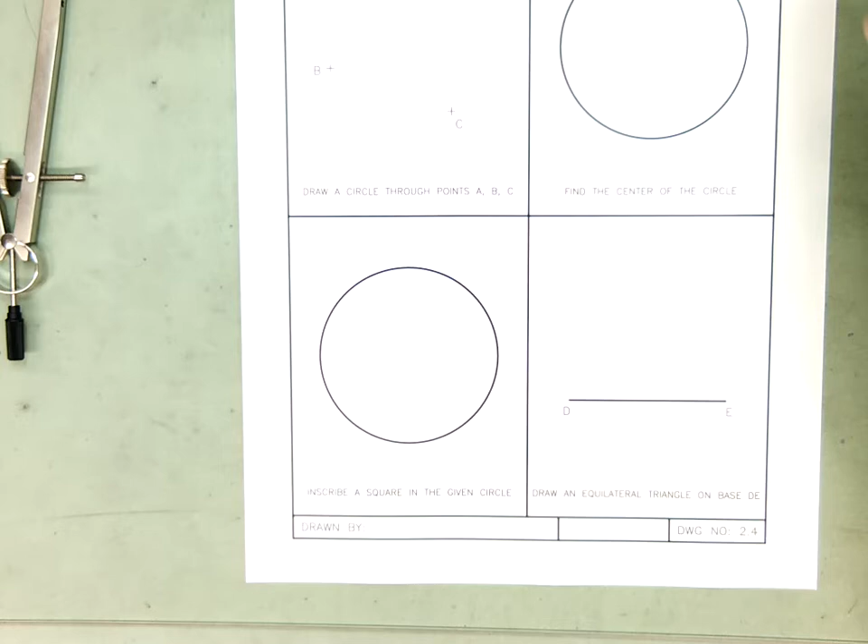For drawing 2.4, we're going to be working with some circles, and in order to pull this off successfully, we're going to have to tape our paper down.

So as usual, when we're working with tools, we want to be taped down. We'll pick a piece of tape about 5 inches long, you'll have 4 strips, and then use the horizontal edge printed on the page to line that up with the edge of your T-square or parallel bar.

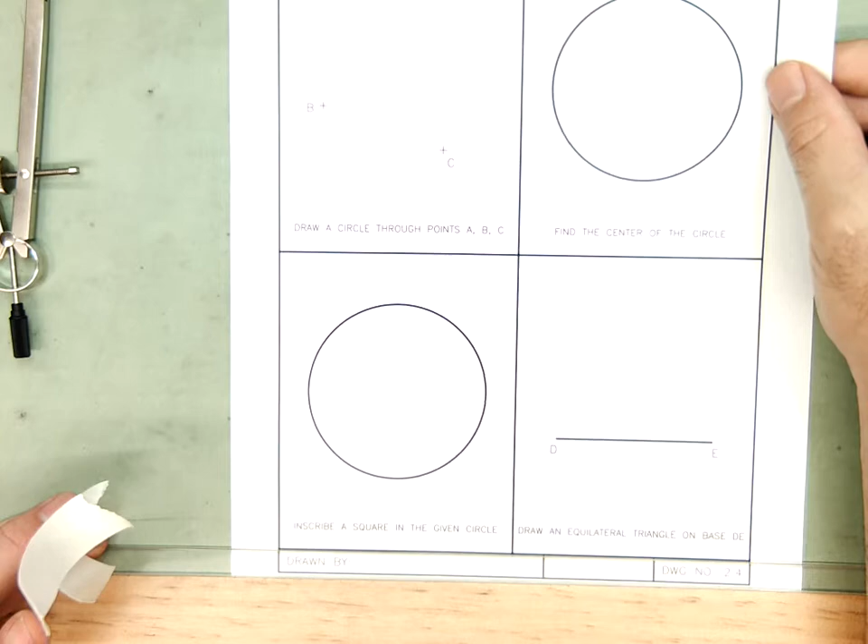And of course your T-square or parallel bar, the head of it on the left-hand side is against the table. I've got my tape on the top, and I've got my tape on the bottom. Now the page won't move around while I'm trying to draw it with the tools.

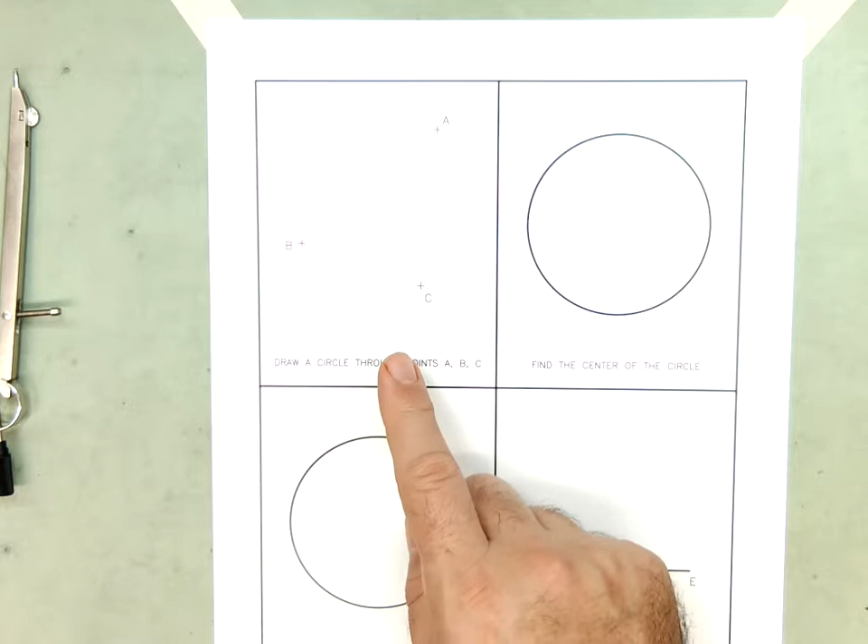So we have a number of different things that we're going to take care of on this one. The first one is to draw a circle through 3 points, point A, point B, and point C. Let's zoom in a little bit.

To do this, we're going to have to lay out some construction lines. First thing we're going to do is connect point A to point B. And you want to be very precise when you do this.

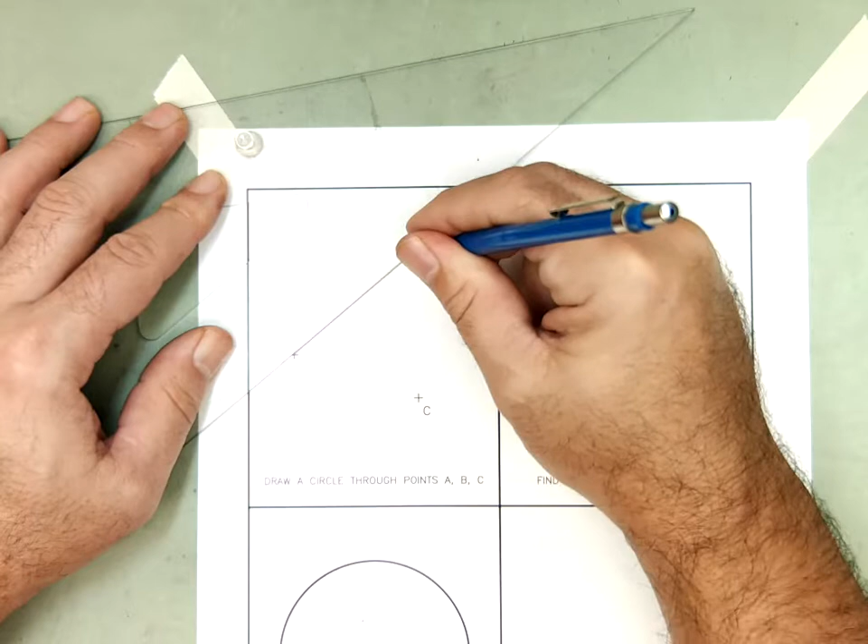Make sure the tip of your pencil is exactly at the intersection of point A, and it's going to land exactly at point B. Because if we're off a little tiny bit, that's going to show up later on. Alright, so that's my line AB.

What I'm going to do now is set up my compass and bisect this line. Now, this is something we've done before, bisect. So we know that we need to set up the compass on the point. The lead needs to go somewhere past the halfway point where we're estimating halfway is supposed to be. And then we're going to swing an arc.

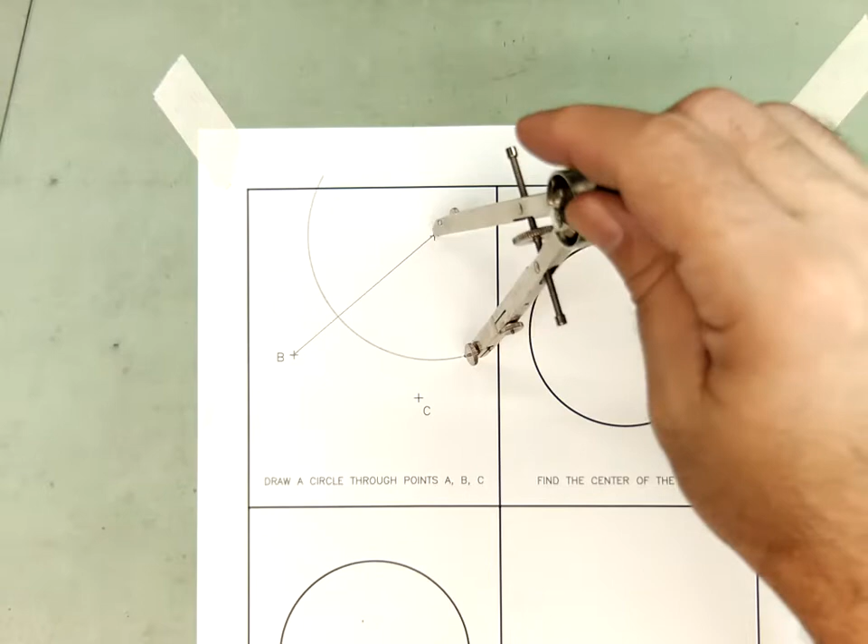And I'll do the same thing from the other point, point B, at the other end of the line. Again, very precise on your needle. And we'll swing an arc. I'm being very careful not to change the radius or move the wheel while I'm doing this.

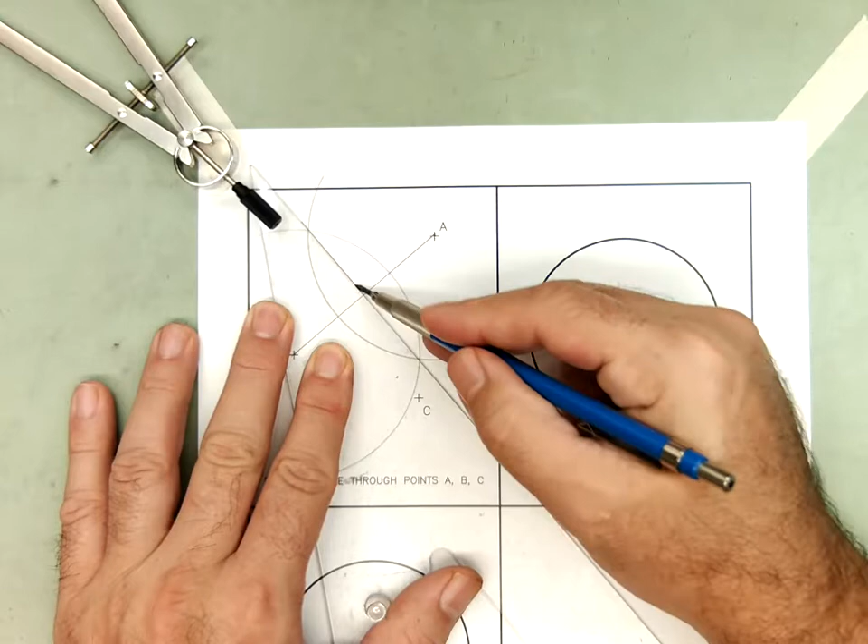Alright, and there's the football shape. And we know that what we do is we line up the 2 points on the football, and carefully draw a line through them. And that line there is the bisector.

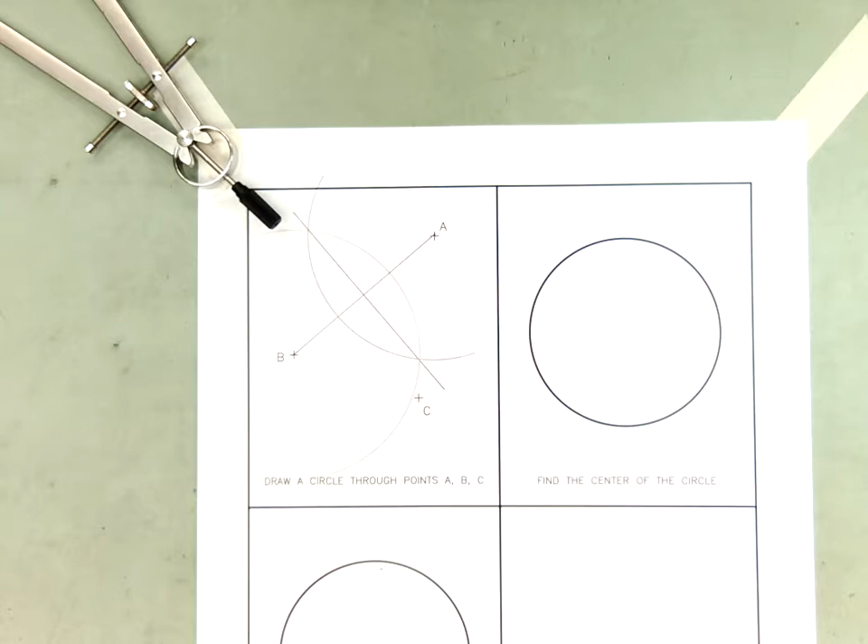Okay, so what I really wanted was the bisector. Now if it makes it easier for you to keep track of what you're doing, you can go in and do a little bit of erasing. You could erase the arcs, because we don't need them anymore.

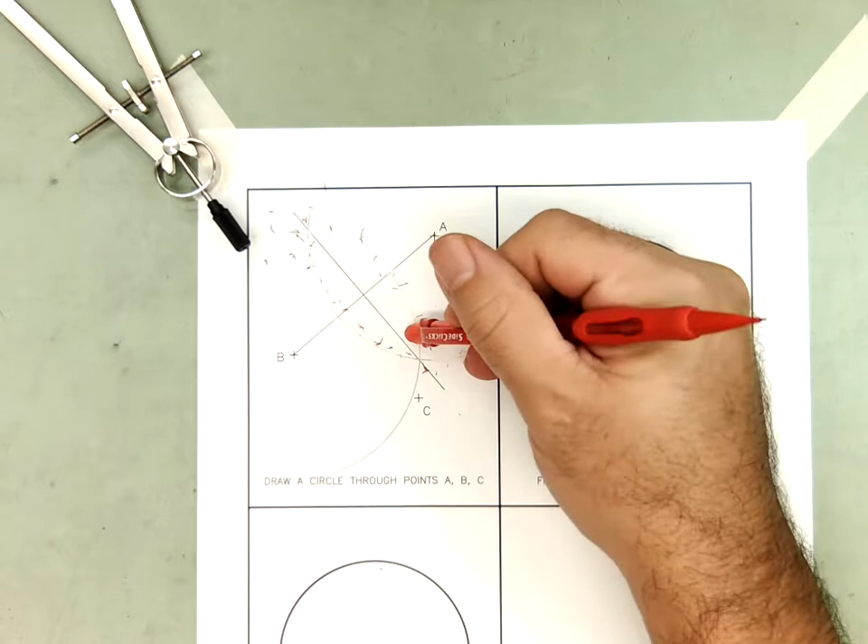And you don't have to be too crazy about erasing them. If they're lightly left on the page, that's fine. So mostly what I cared about was the bisecting line. And we can even get rid of line AB, or at least most of it. Okay, so this is the bisector of line AB.

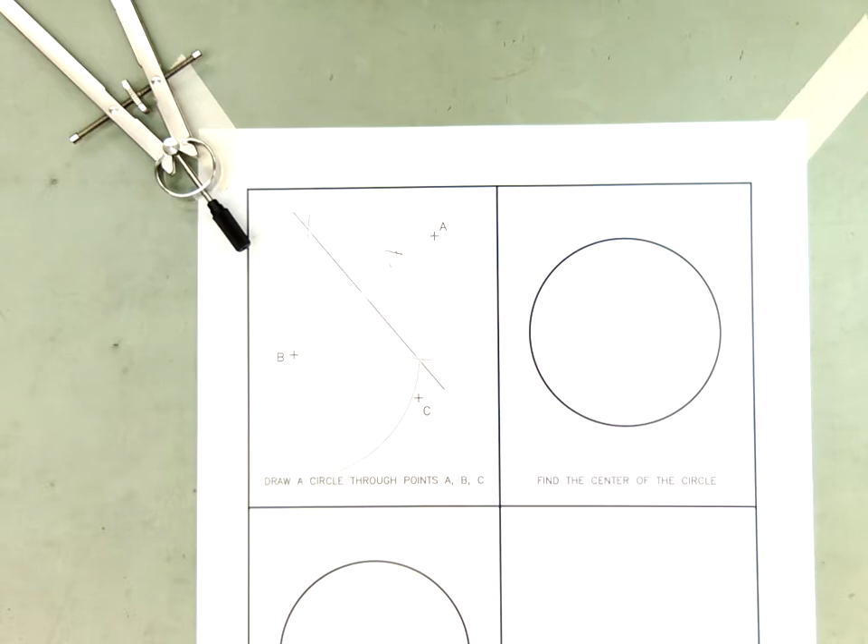I'm going to make another line now, line BC. You could do AC if you want, you could do BC if you want. The point is we're going to connect 2 of the other points.

So again, very precise on my start point. Make sure that when you finish, very precise on your end point. That is line BC.

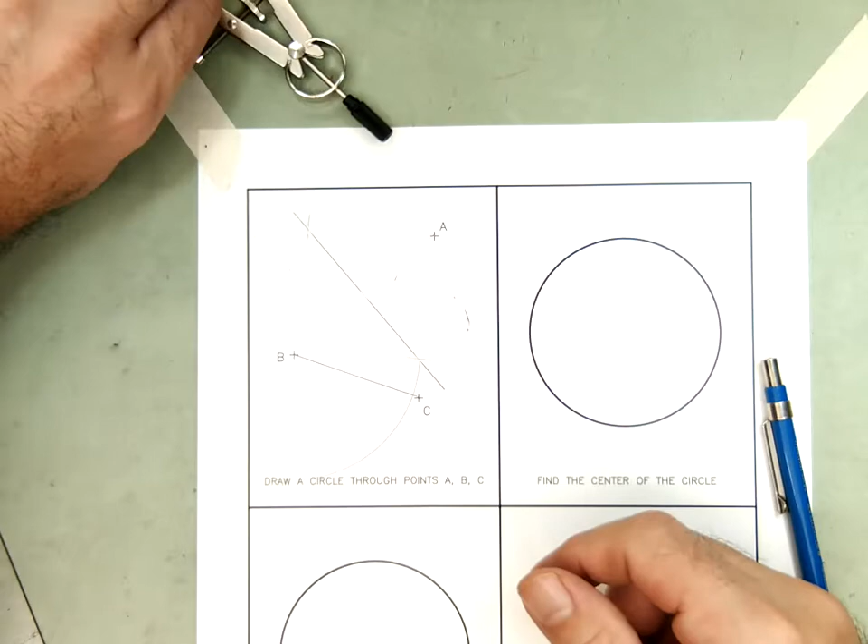Okay. I haven't moved my distance here, I haven't spun the wheel any, so I'm going to just recycle the setting that it's on. Right, here is my arc for circle at point B. I'm going to do the same radius circle at point C.

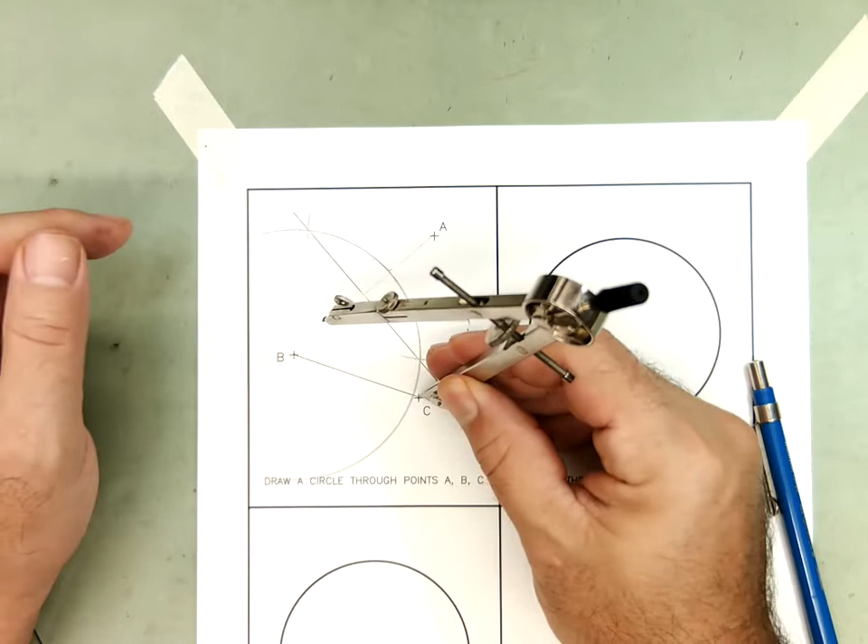And what we'll see is, there it is, right? Another football. And if I want to bisect, I'm going to draw a line from one end of the football through the other end.

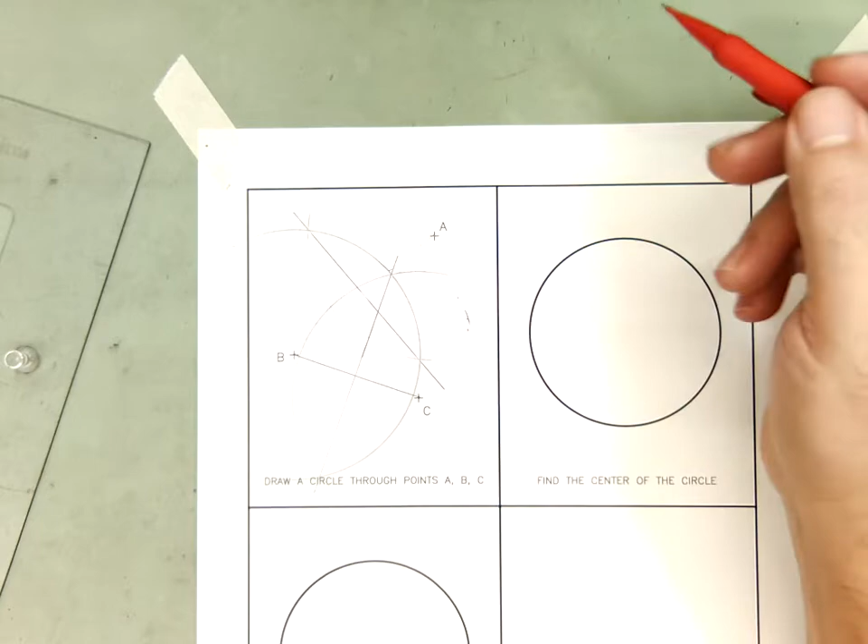Again, what do I care about? I care about the bisector of AB. I care about the bisector of BC. I really don't care about anything else on here. So what I'm going to do is just clear things up a little bit, erase some of that line work I don't need anymore.

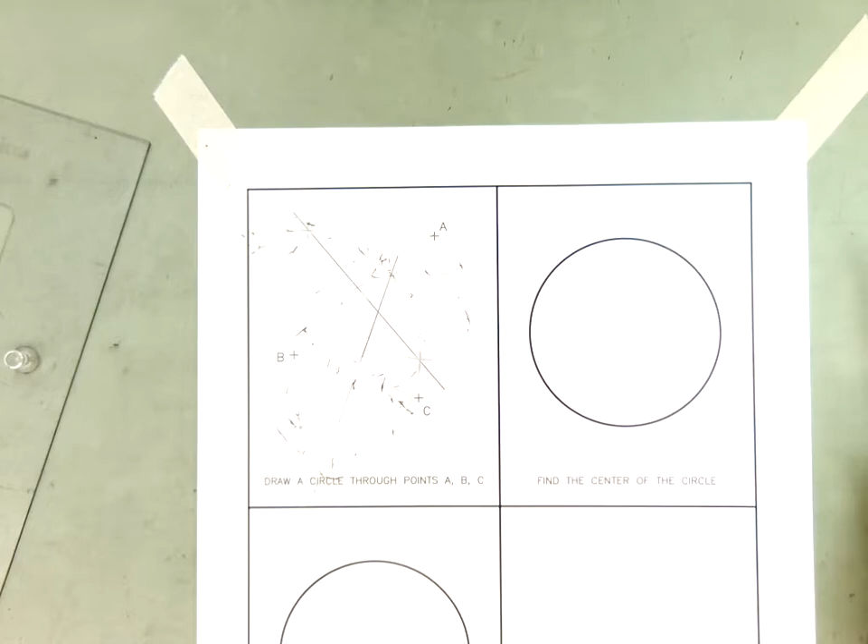I can get rid of the two arcs I just drew, and the line from B to C. What I'm really looking for is that spot right there. X marks the spot. All we need is that small x, because that tells me where I need to start my circle.

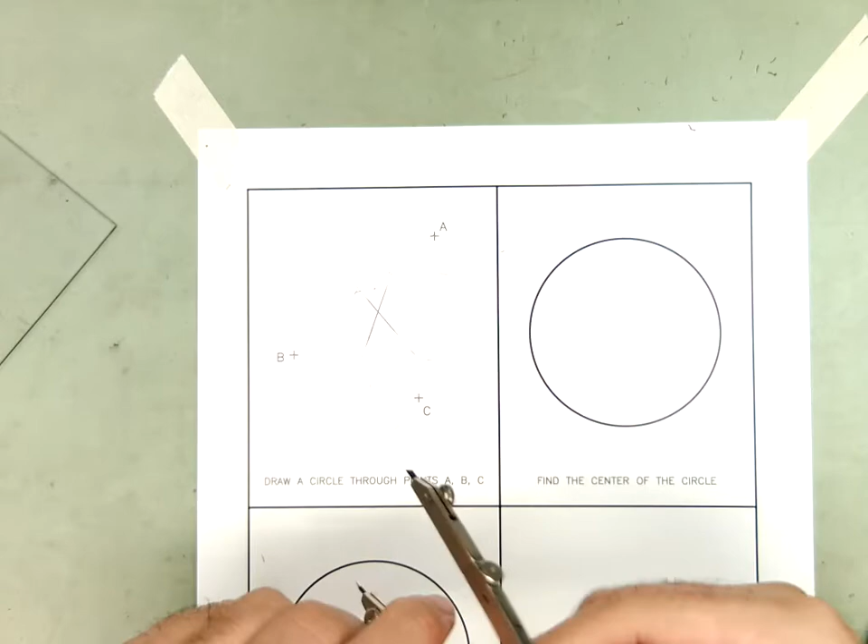So what am I going to do? We're going to take our compass and adjust it. We're going to put the point at the X. X marks the spot. We're going to adjust the wheel and move the lead until it's touching one of those points. I'm going to set my lead to touch point B.

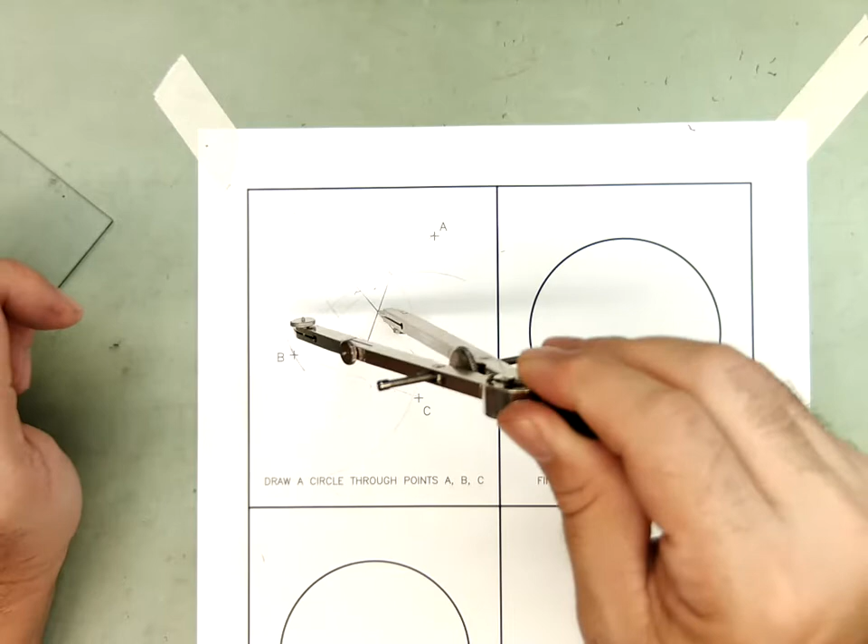But before I draw a circle, I want to verify. Does it also touch point A? It does. Does it also touch point C? It does. So now when I make my circle, I'm going to have a circle that passes through all 3 points.

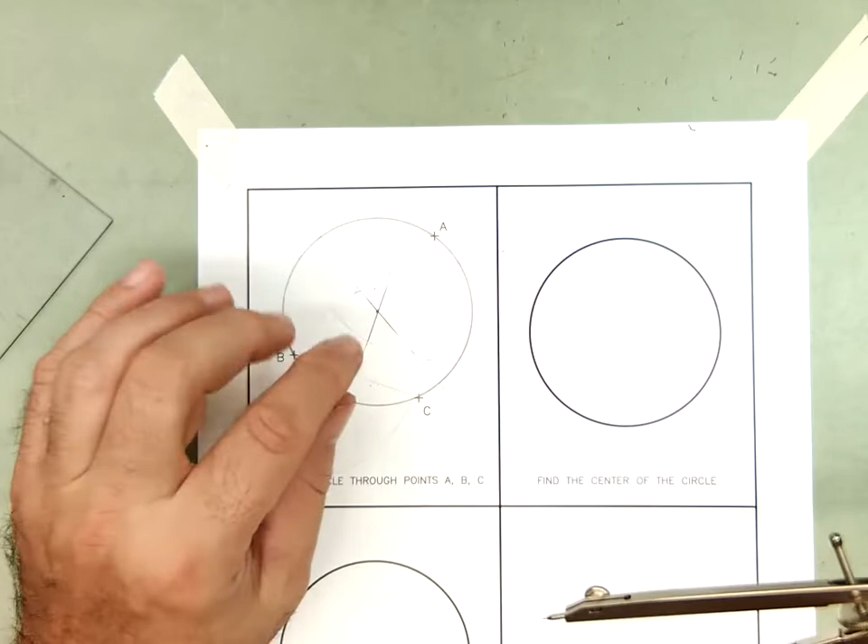Now, if you're off a little bit, you might want to examine: did I really put the needle in the exact center, or is it off a little? And when I bisected my lines, did I really take my time and make it careful? Because if you're off just a tiny bit on each of those things, at the end we're going to have a big gap at least at one of these points. So this is how we draw a circle through 3 points, A, B, and C.

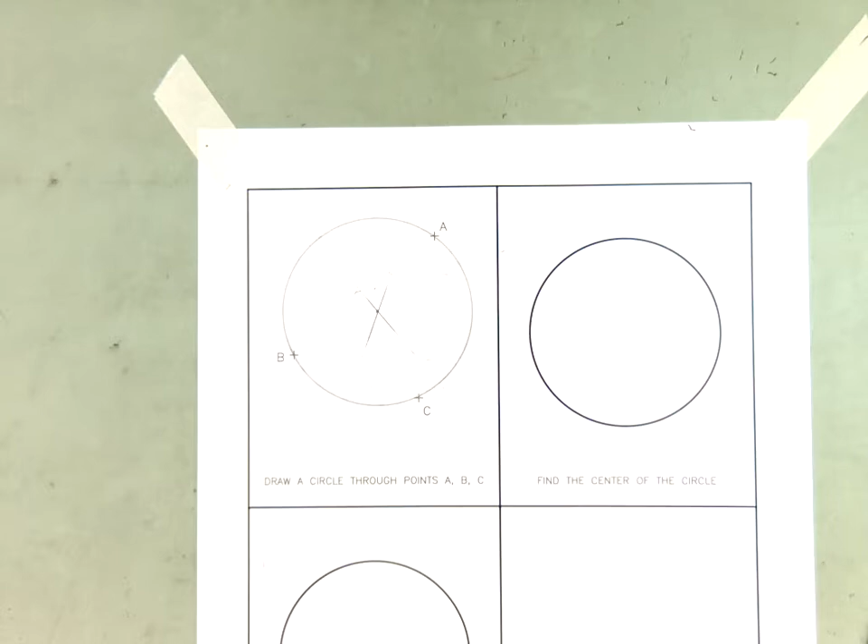Our next task is to find the center of the circle. So I have the circle here, but I don't know where the center point is. I didn't make it with a compass, so there's no hole in the paper to tell me where the center is. So this is really simple.

If you are taped down, and if your parallel bar has been set up, or your T-square, and you're able to draw some parallel lines, some straight horizontal lines, what you want to do is draw a line at the very top of that circle. You want to draw a line tangent to the top of that circle.

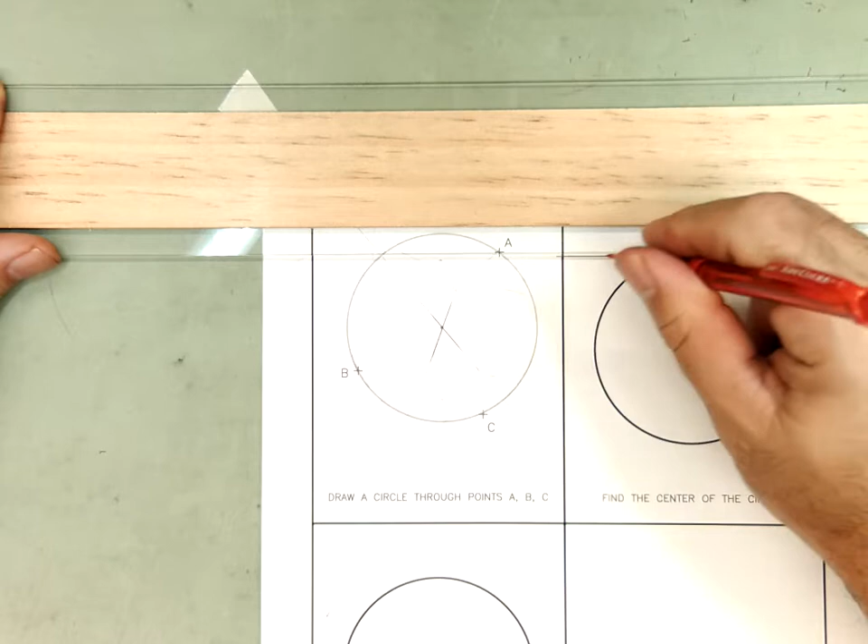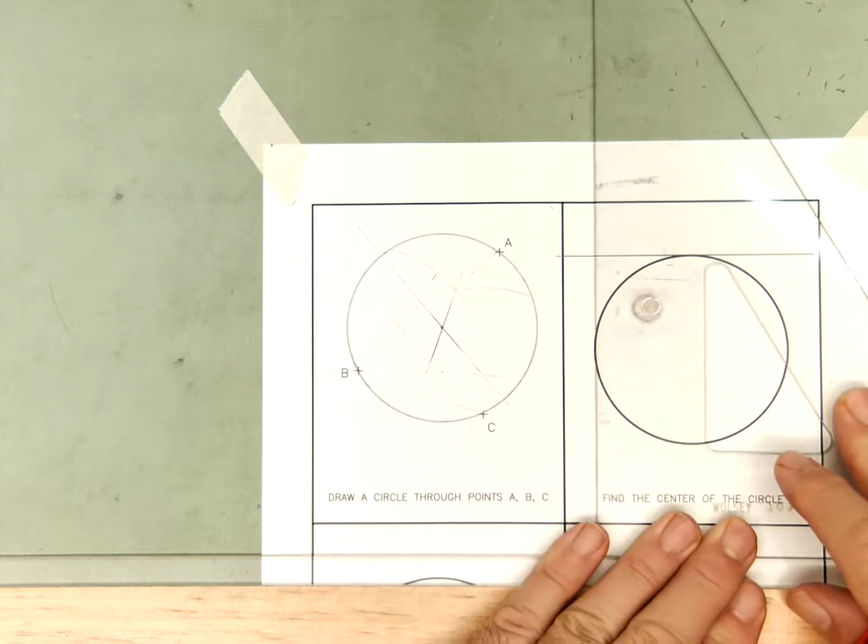Now again, make sure you're being very precise, because being off a little bit is not going to give us the results that we want.

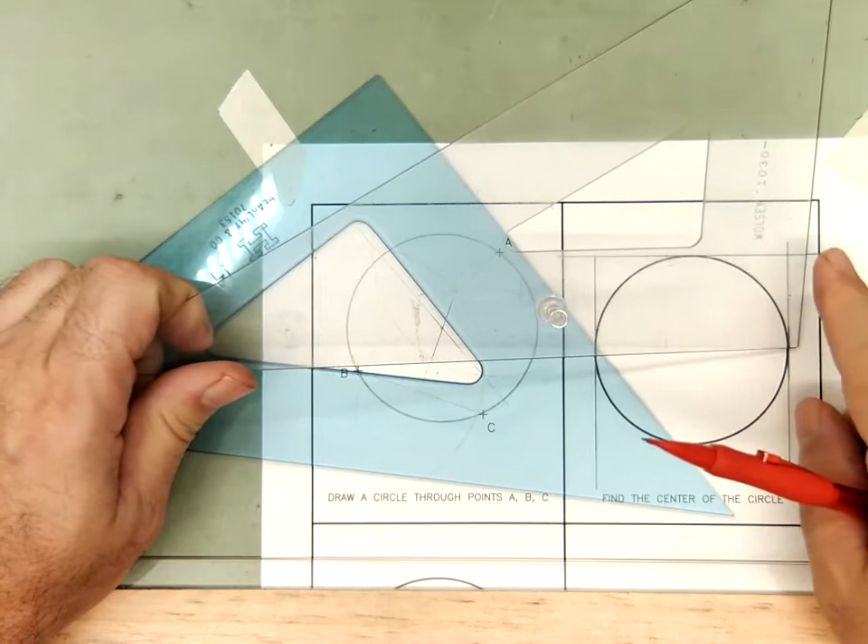And now for our next trick, what we want is our 45-degree triangle. Now we don't want the long, skinny one. That's 30, 60, 90. We want the one that's got 2 equal angles, 45, 45, 90.

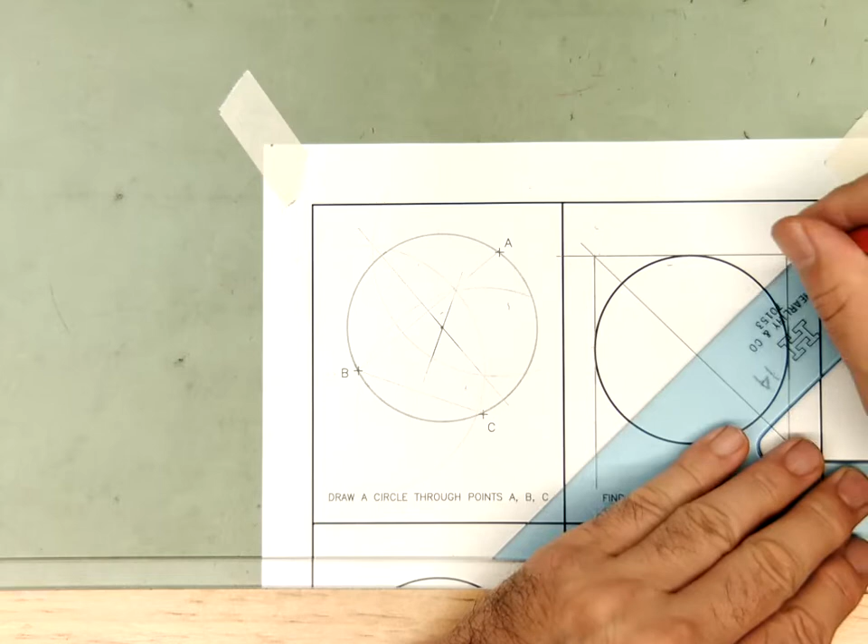What you can do is put your 45-degree triangle up at this corner and go down. And you can put your 45-degree triangle up at this corner and go down. And in doing so, we just found the center of our circle.

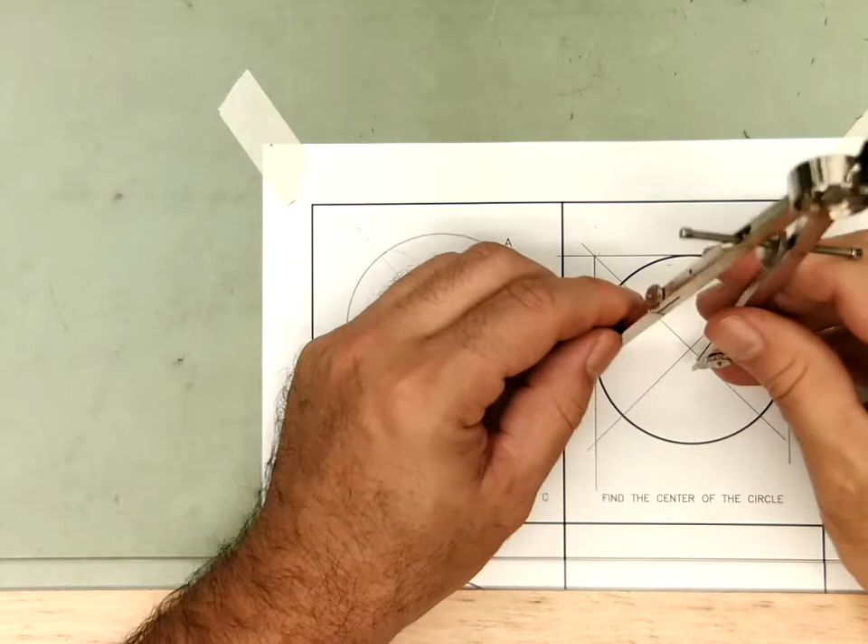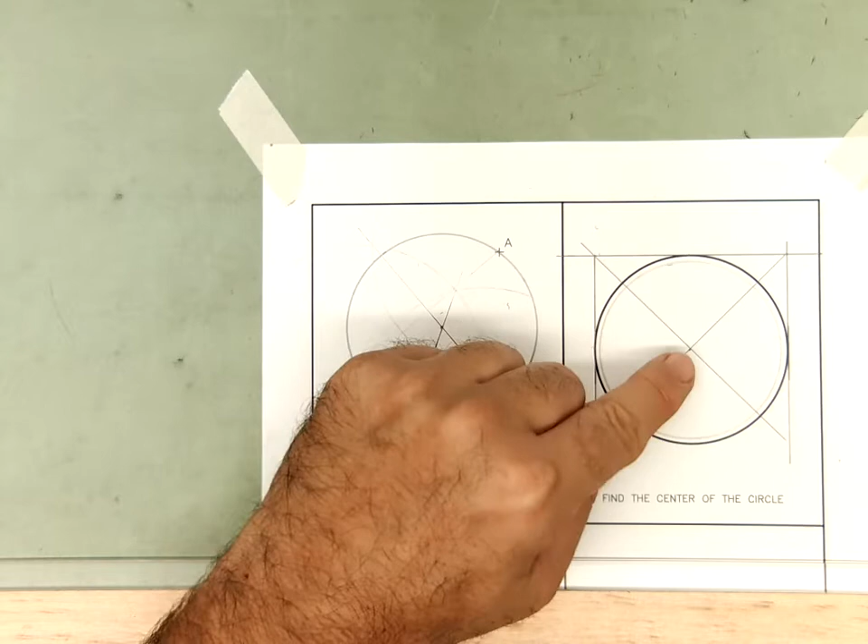If you're not sure, if you wanted to double check it to make sure you got it right, put the compass point in the very center of the circle. Make a little circle just a little bit smaller than the circle that's there. And what we should see is an even gap all the way around. That shows us we did find the exact center of that circle.

So, we didn't know where the center was, now we do. Here, we didn't know where to put the center point to make the circle. It took a lot more work.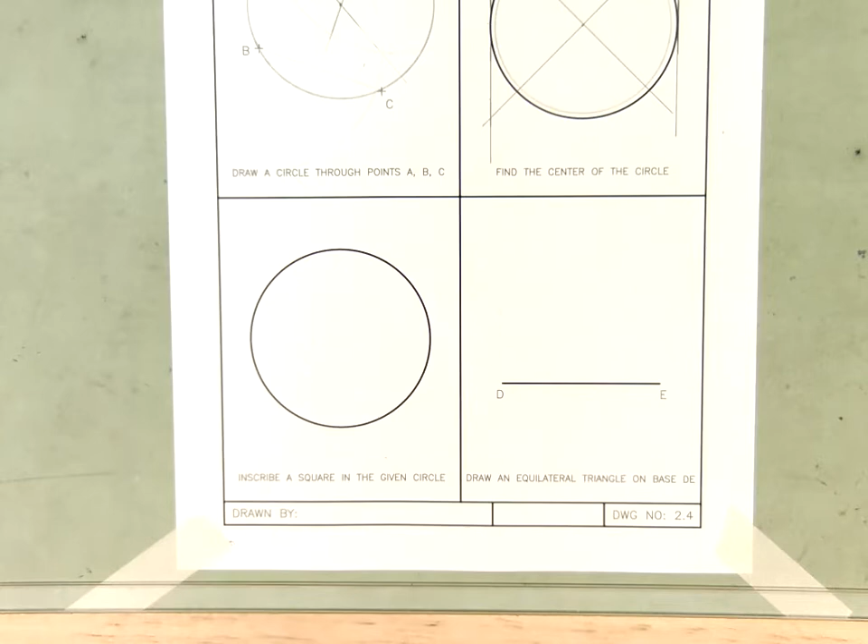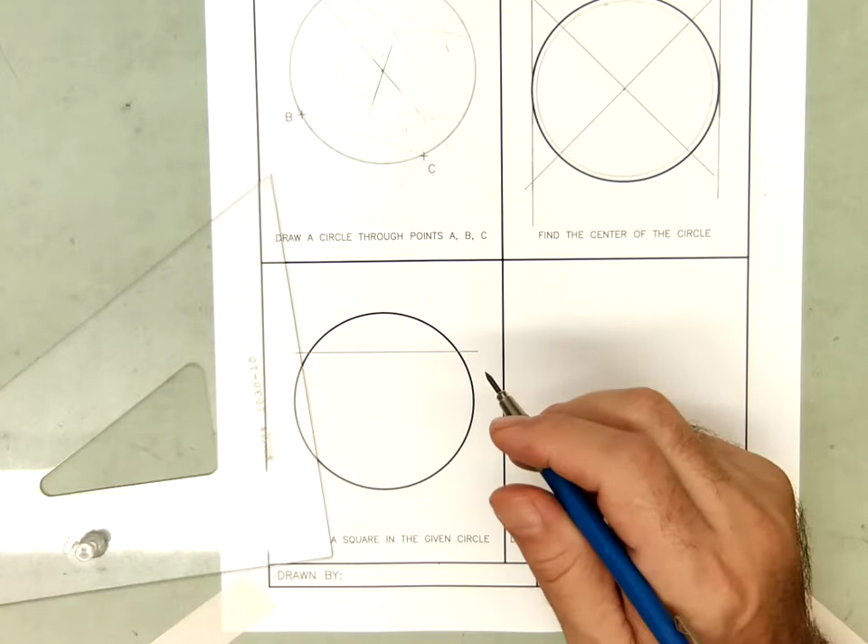Fact is, you could draw a line anywhere through the top part of that circle to find its center. I'm going to draw a horizontal line going exactly through. Then if you bring down the point where the circle intersects that horizontal line, remember I'm using my parallel bar and my triangle, one on top of the other. I'm going to come straight down, and I'll do the same thing over here, coming straight down.

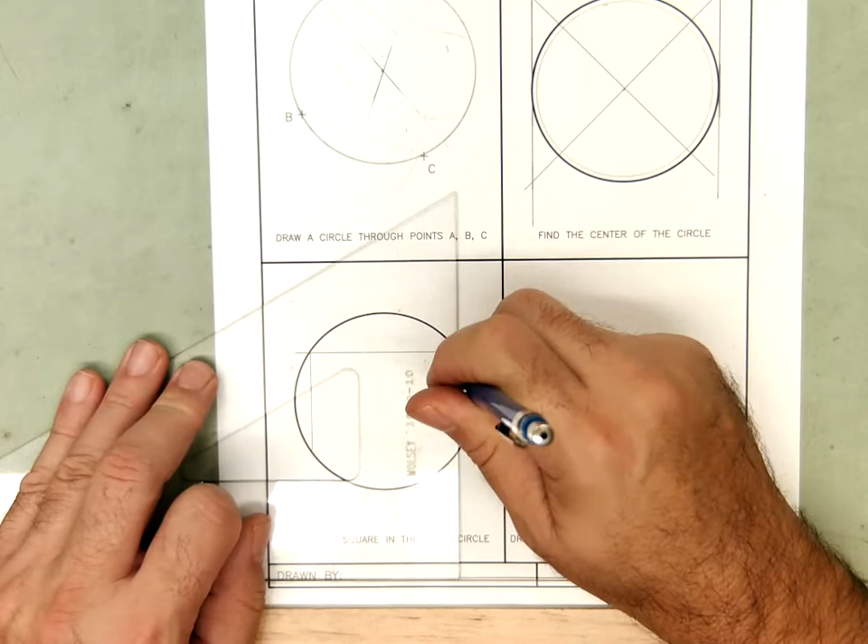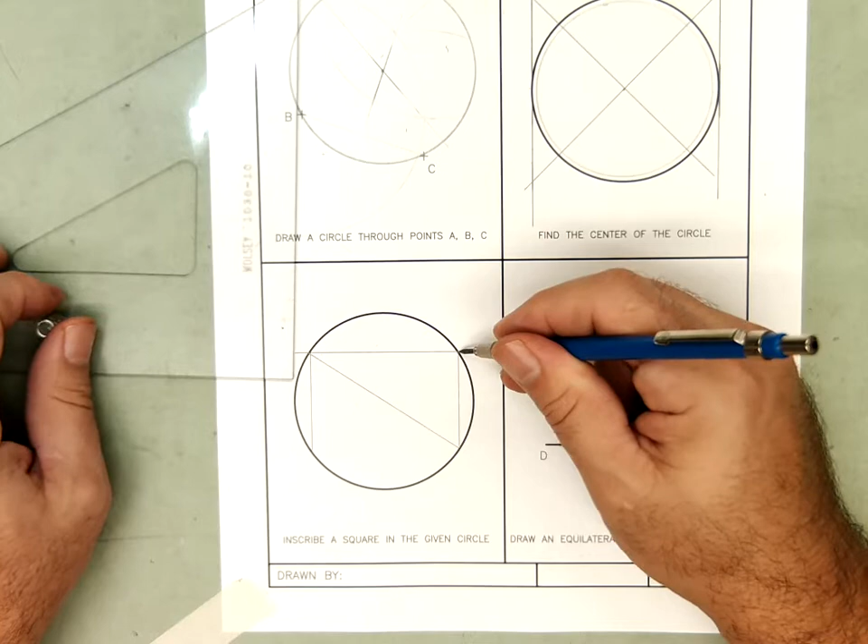Now I can just pick up my triangle and freewheel it from here to here, where the line ends against the circle, to where the line ends against the circle. I'll do the same thing here, from where the line ends against the circle to the opposite corner, where that line stops at the circle. Okay, and we just found the center point. So this is another way to find the center point of a circle. We did one way up here, and we're doing a second way here.

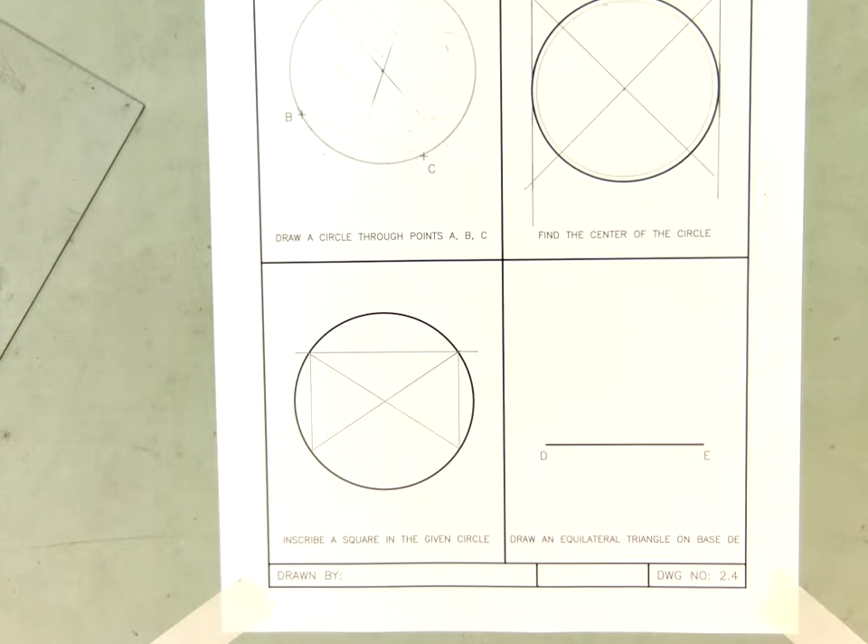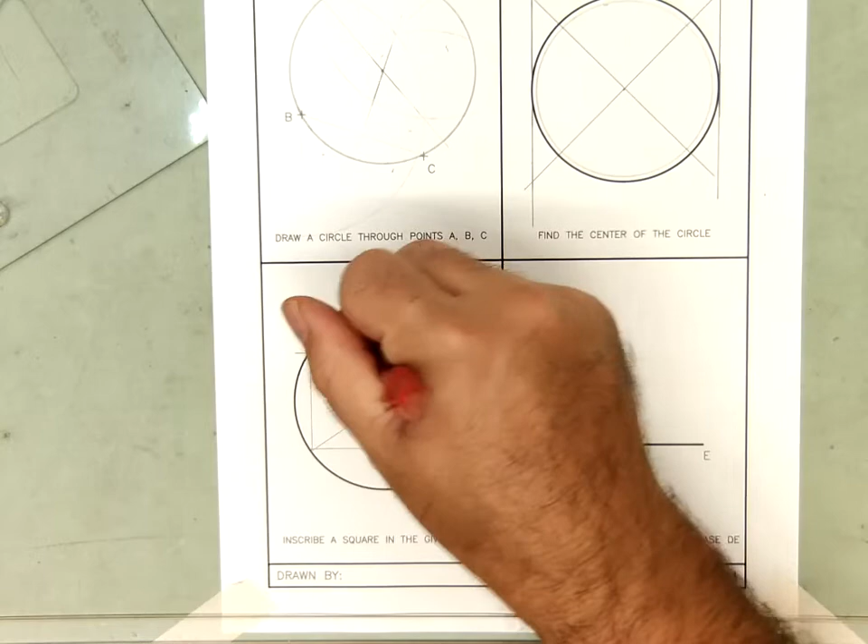Now, the task wasn't to find the center. The task was to draw a square inside that circle. And this is not a square. I don't know if you can see this, but if you were to do this, that's a rectangle, not a square. The reason we set up the three lines and the X was to find the center point, because that's essential to what we're about to do. I'm going to get rid of everything else I drew, and I'm hoping you drew yours lightly, so when it's time to erase, there's no problem.

Okay, what I really want is X. X marks the spot. So now that I know where the center of the circle is, I'm going to take my 45-degree triangle, start at the center point, and go up to the edge of the circle, the perimeter of the circle, at 45 degrees.

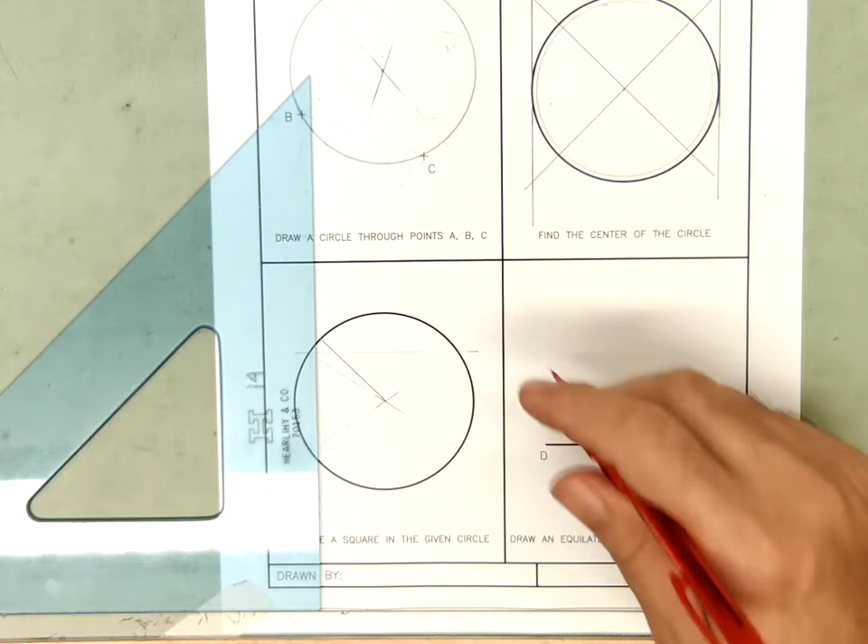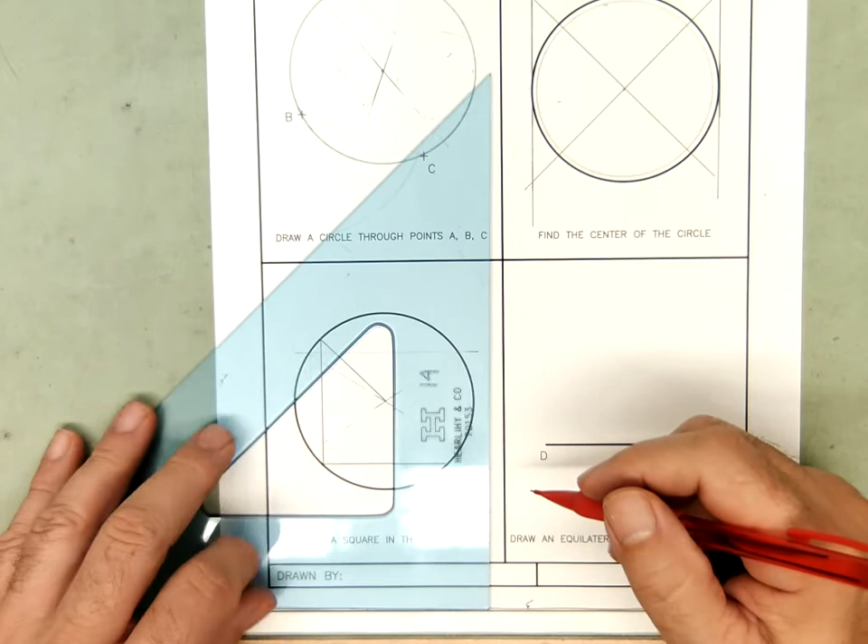Okay, here we are. So now I'm going to go down vertical, which means parallel bar, T-square is set up, triangles on top of it. Then make a new line. And then from that point I go horizontal to here. And from that point I go vertical. 1, 2, 3 sides, and then here's our final side.

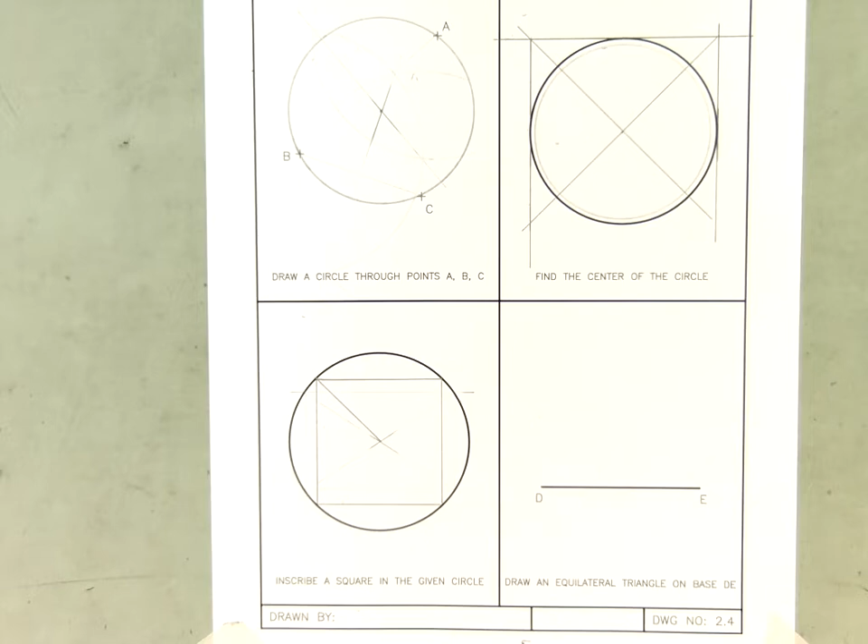And these two points should line up nicely. Okay, and that is our square drawn through, inscribed from the center point of the circle. Now, it looks to me like on the screen it looks more like a rectangle. In fact, there's some distortion going on, it looks like. This doesn't look like a circle, it looks like an ellipse. So I don't know what to tell you. We're having technical difficulties on the camera, and we're getting some distortion. But trust me, that's a circle, and that's a square. Just like that's a circle, and that's a circle.

All right, last but not least, draw an equilateral triangle on what base? DE. So we're going to draw a triangle with 3 sides, each side equal length. We're going to use DE as the base.

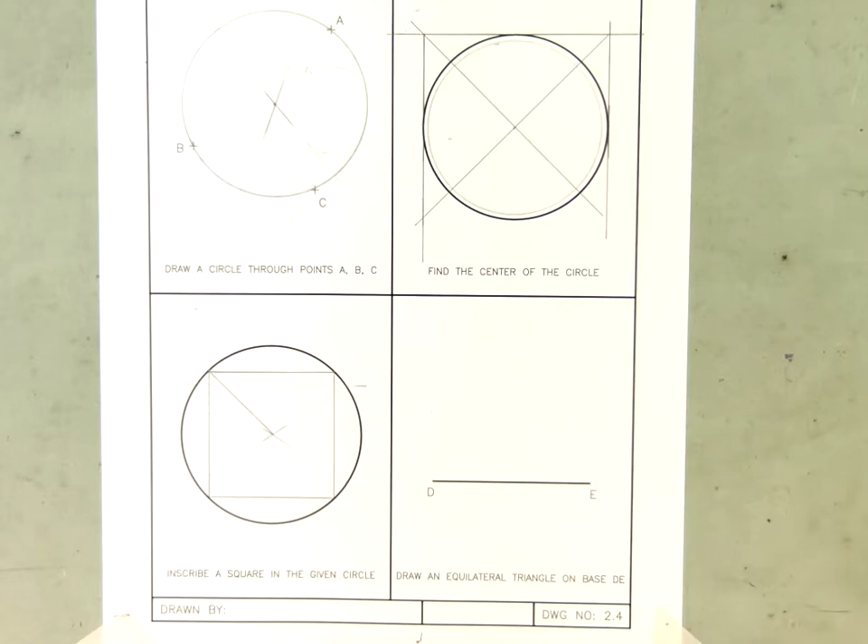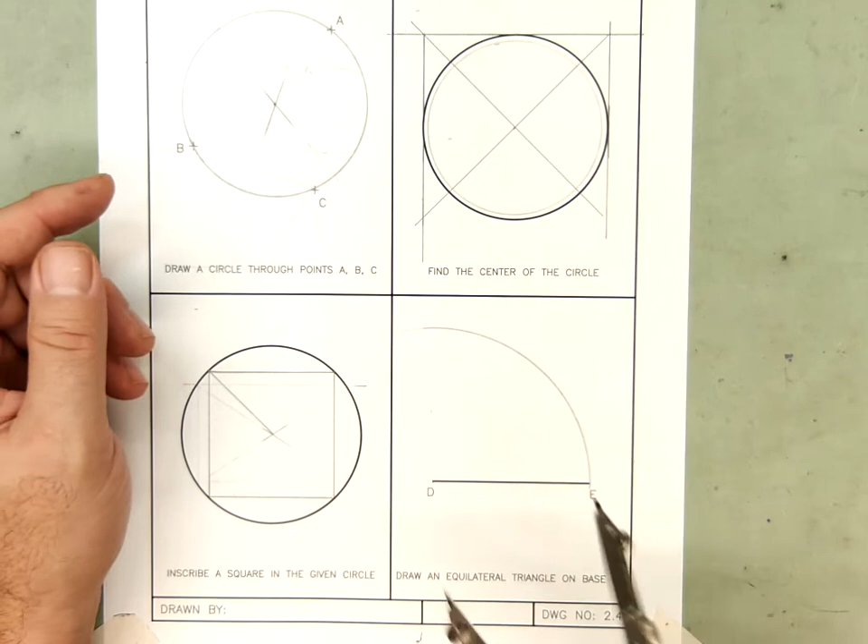So to set this up, point of the compass goes to D. Open the leg until it's touching E on the lead. And then make an arc going up and to the left. Okay, now we're going to put our point on E, and our lead will be down at D, and we'll make another arc going up to the right.

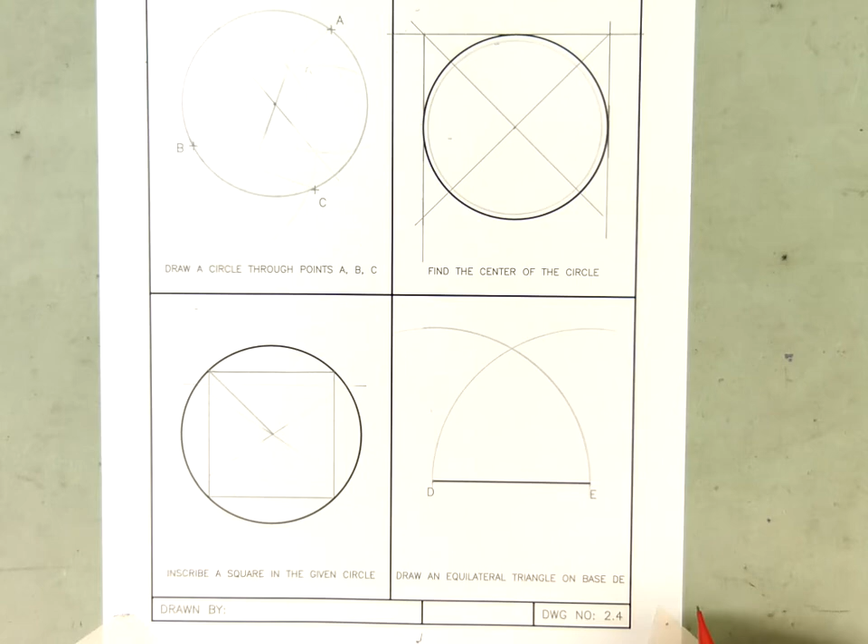Now if you're looking at that and saying, well, that's not really an equilateral triangle, that looks like a real chubby triangle, you're right, it's not. But what we were trying to find was that spot right there. Because now I can go back with my triangle and freewheel it, connecting the apex here at the top to D, and then connecting that apex down to E. And now what we've got is a triangle with 3 equal sides on base DE.

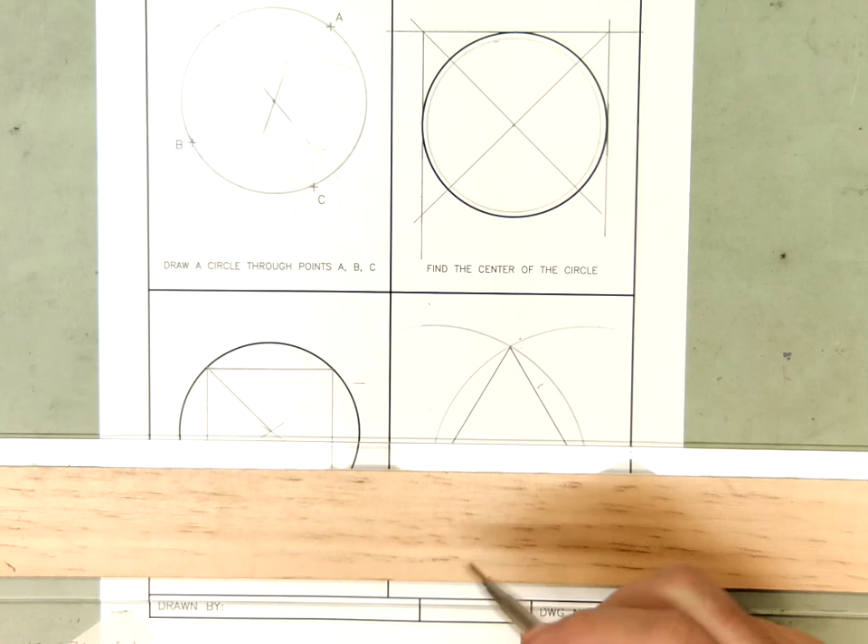So this is how we take care of sheet 2.4. You're going to go in and very carefully add some very light guidelines, and then you'll be printing your name, all caps, down the bottom to finish this off.